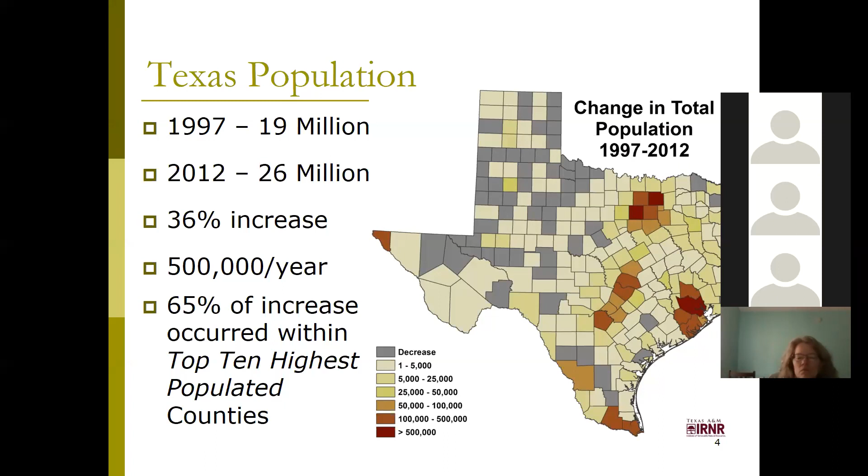And so when they saw that population change, what they did at the same time was also look at the loss of rural working lands over that same time period. And when they looked to see where that rate of conversion was happening, they saw a lot of that was linked to those areas where we're seeing that increase in population, where we're losing some of those rural working lands, and a lot of times those cities are getting built out. So we're building more parking lots, more buildings, residential areas to support that increase.

And what happens is then that's changing the look of our watershed. So we're losing those rural working lands that had good vegetative cover, healthier soils that are going to be able to absorb a lot of that water and slow down that flow of water, especially during those storm events. And a lot of times making it impervious as we're building streets and parking lots and buildings. So then that's not going to be able to soak in and absorb that storm water. So now it's just going to be running off of your system.

And so when we see that, that's one of those drivers for these increasingly damaging floods that we are especially seeing in our urban areas, because now during those storm events, we're not going to be able to capture as much water on site. So we're going to be having a higher volume of water moving faster, and it's going to be causing a lot more damage during those larger storm events in the cities. And I think all of us that live in these urban areas around Texas have seen some of the effects of flooding in our areas.

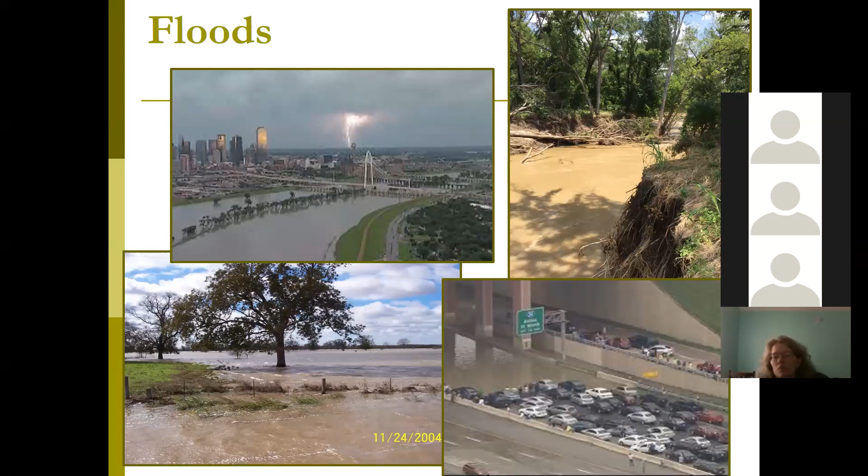The other effect of having poor riparian areas and the change of our watersheds from the increase in population is that when we have that higher volume of water and when it's moving faster and you don't have that good vegetation that's slowing down the flow of water and helping to protect those banks, we increase the amount of erosion along the stream system, the erosion along the banks.

And so when we're having more land that's falling in with those higher erosion rates, then we're losing land that we could be using for other purposes. It's going to lower our property values. It's also a risk for human safety, especially in our more public areas where there might be a lot of erosion. And when we have all of that excessive erosion, we have more sediment that's entering into our stream systems.

And so when that excessive sediment gets into our streams and then it's going through the river, once it hits a reservoir or a lake where that fast moving water then slows down, that sediment starts to be able to settle. And as it starts to settle, it's going to start reducing the storage capacity of that lake or reservoir. So, some erosion is natural, but when we have that excessive erosion, that's when you start getting more and more sediment entering into our stream systems, and then it starts settling and reducing that storage capacity.

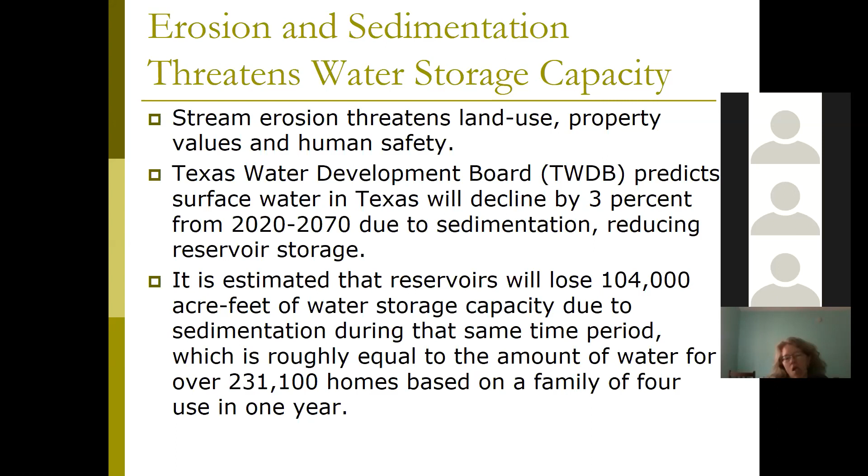And unfortunately, right now, there's not a lot of great strategies for how to combat some of this sedimentation that we're seeing. So the Texas Water Development Board also noted that sometimes the dredging, so trying to remove that sediment from that reservoir once it's already in there, can be just as expensive, if not more expensive, than just building a new reservoir completely, which isn't exactly the best option either, to build a whole new reservoir instead of being able to remove that sediment.

So several areas, such as the city of Austin, have found that being a little bit more proactive helps. So instead of trying to spend all this money or trying to figure out how to improve this once that sediment has already entered into the reservoir and already has started to reduce that capacity, what can we do to prevent it from even getting to that point?

And so what they found is by improving their floodplains, providing that good vegetation, and helping stabilize those banks, they can capture some of that sediment and reduce the amount that's entering into our streams and creeks. So that's going to save money in the long run. You have to put out more money in the beginning, but it's going to save you money because you're not going to have to build a new reservoir or dredge it after it already becomes a problem.

So all of that has brought us to why we wanted to start offering this program. Dr. Jaber has been doing these programs up in the Dallas area, but we really wanted to bring it statewide because a lot of these issues are what we're seeing around all of our urban areas here in Texas. And we want to promote the idea of doing stream restoration, but also making sure we have some of these ecological benefits of having these healthy riparian areas and these healthy stream systems.

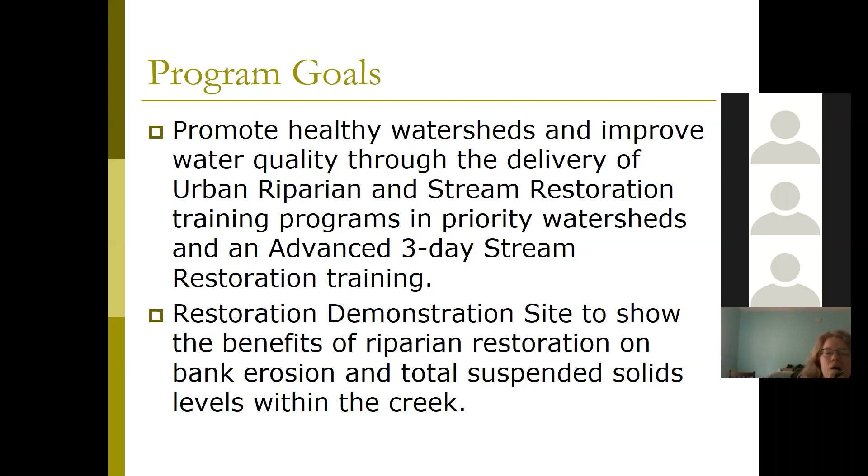And so we do that by offering these educational programs, but we also have a demonstration site in Seguin, which I'll talk about in a few slides. So these programs traditionally are one-day trainings that we try to focus on the urban areas because that's where we're seeing a lot of stressors and a lot of changes in our systems.

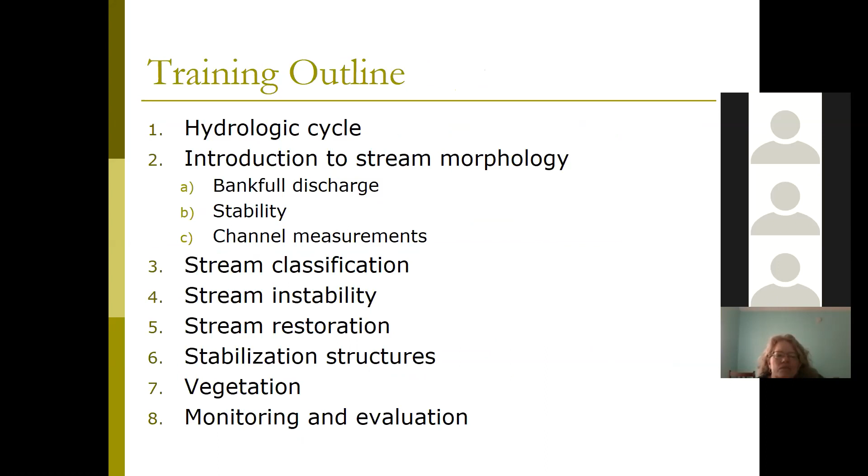And then the other part of this, besides doing these educational programs, is we really want to be able to have a demonstration site where we can hopefully show some of what we're teaching, some of these benefits that we're talking about. So we're working with the Guadalupe Blanco River Authority, the Irma Lewis Seguin Outdoor Learning Center, and the Geronimo Alligator Creek Watershed Partnership.

And we've set up a control site and a treatment site on the Geronimo Creek, where we've done natural vegetation on 100 feet of the bank, and then we left a site that we didn't vegetate, and we're monitoring both to hopefully show that having good natural vegetation is going to help reduce sediment from entering the creek and help reduce some of the erosion rates along the banks.

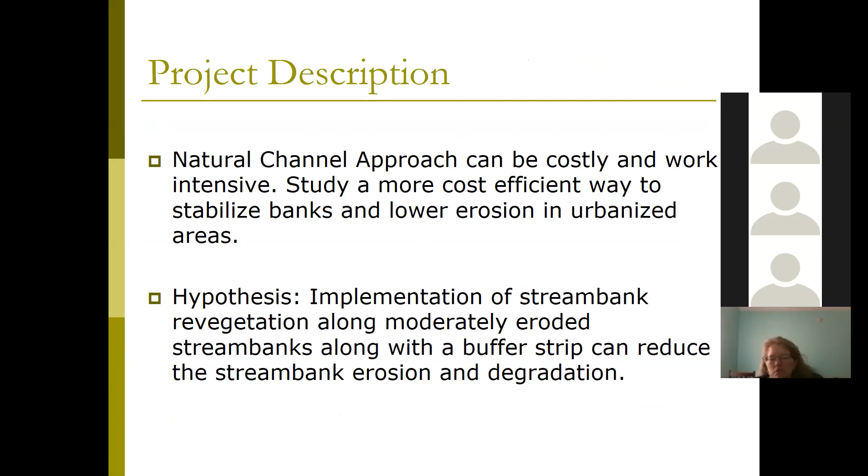So the hope is for some of these areas where maybe you don't need to do a full engineering project, where it's only moderately eroding, maybe you can look at just doing some of these low-cost things, like adding in more natural vegetation, good stabilizing vegetation, as a more cost-effective way to help restore these areas.

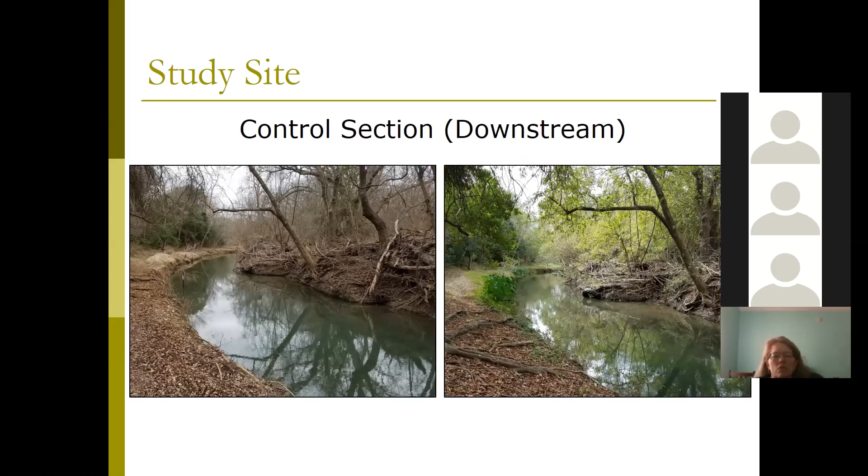These are pictures before planting of what our treatment site looked like. So you see that it was pretty much just some weak grasses. There were some elephant ears that we left in place for a little while as our other vegetation set, and then we sprayed to try to remove some of that. And then here's a picture of our control site down at the Outdoor Learning Center.

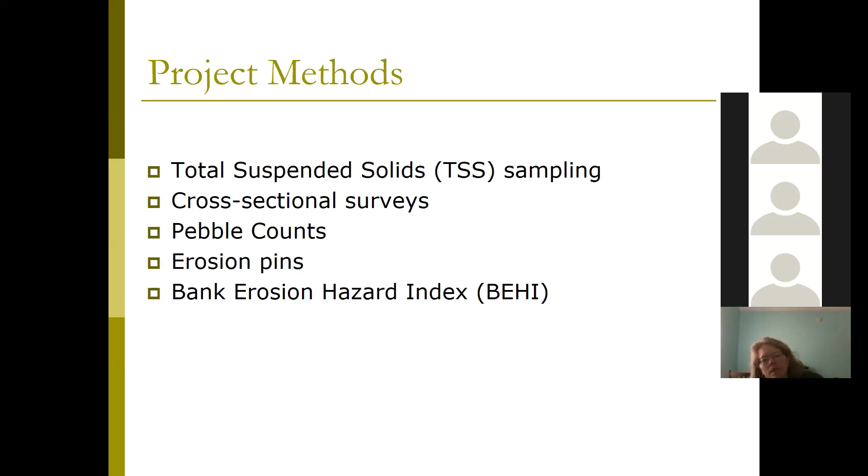So what we're doing is we're sampling for total suspended solids within the creek. We do that quarterly, as well as during storm events that produce 1 inch of runoff. We're doing cross-sectional surveys and pebble counts annually, just to see how the profile of the stream channel changes. And then we also have erosion pins and the Bank Erosion Hazard Index that we do quarterly, to see if we're having a lot of erosion or if we're slowing down erosion, comparing the two sites.

So this is a look. We have ISCOs set up to capture storm events, and then we take it to GBRA to do the analysis for TSS, as well as grab samples during our quarterly monitoring. And we have these ISCOs set up at the start and at the end of each of our treatment and control sites, so we see how much is coming in and how much is leaving the system during each of those events.

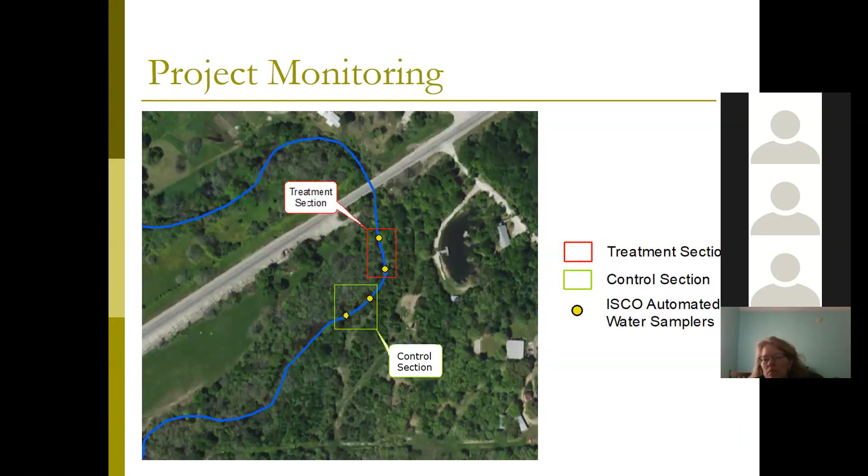At each of the treatment and the control sites, we have 4 cross sections that we measure annually to see the change in the profile, as well as we do pebble counts. And we will talk to y'all more about what the cross sections and the pebble counts are later in the day, but we won't actually be able to do them today.

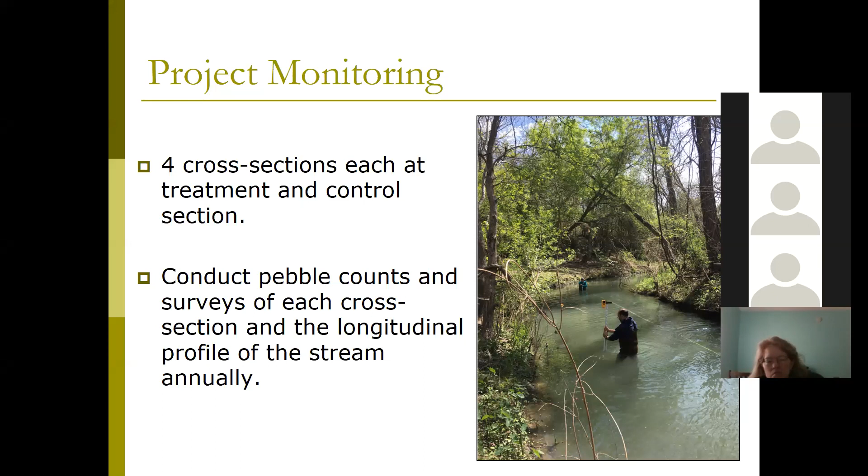And so we'll do that at each of the cross sections quarterly on both the treatment and the control site. So what we hope to show is that by adding in that good, healthy vegetation, by providing some of those natural services, it's going to provide those ecological benefits that we want. It's going to help dissipate the stream energy, so it's going to help to slow it down. And by slowing down that flow of water, especially during those storm events, it's going to help stabilize the banks more, so that's going to reduce some of that excessive erosion.

We're going to be able to trap more sediment, and being able to trap that sediment, it's going to allow us to build and enlarge the floodplain. So that's going to give us better water storage capacity. It's going to help slow down that flood water. And when we're able to store more water on the land, it's going to allow for some groundwater recharge and also allow us to sustain the base flow, which is especially important during those summer months when we're not seeing as much rain, to be able to still provide that water.

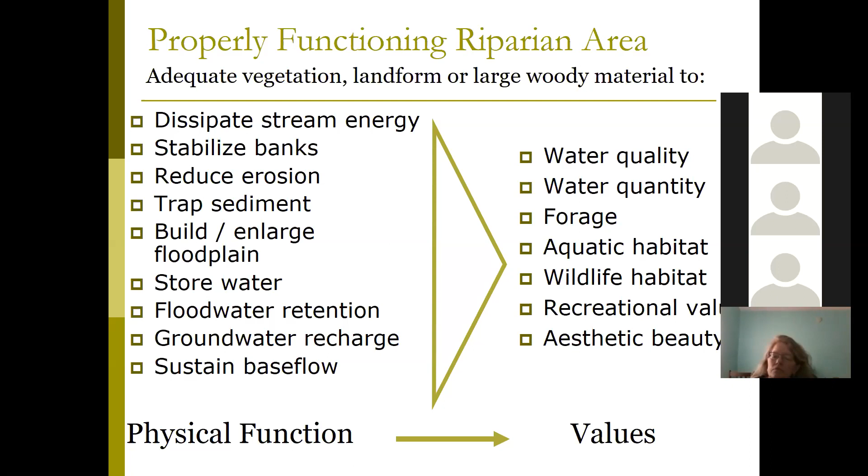And so what we really try to show is, even though we call it a watershed, we want to think on a watershed scale, we really don't want water to be shedding off of our landscape. And as much as we can, we want to make our watersheds a water catchment, where we're going to be able to capture more of that water on site and to slow down that flow, and also be able to pick up any pollutants or sediment as it comes off of the landscape.

And these water shedding and water catching systems, you can see right along the stream banks as well. So here up on the top left is, I think, from excessive grazing on this property, but you can see there's really nothing protecting those banks or that stream system during any large runoff events, as opposed to down on the bottom right, where that's going to really be able to slow down that flow and help protect those banks more.

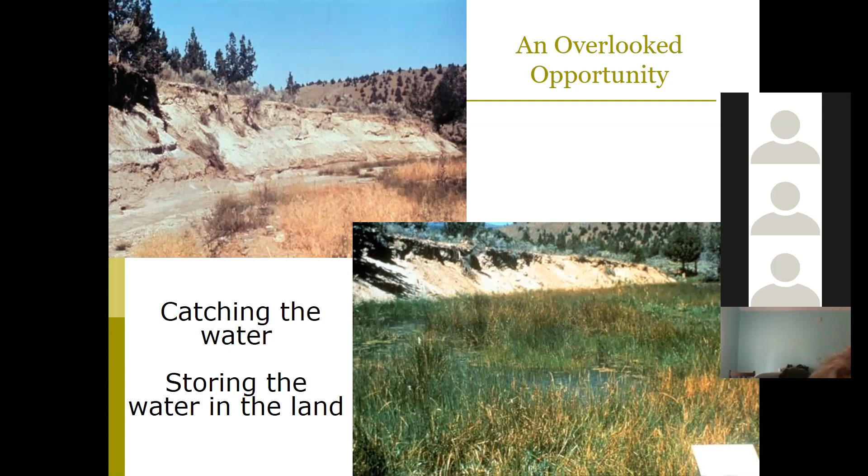And there's a lot of other benefits that come when you're managing your stream systems for these healthy riparian areas. As I mentioned, it's going to improve water quality. So we're going to see less bacteria, nutrients, and sediment entering into our stream systems. We're going to see lower in-stream temperature. It's going to improve our dissolved oxygen levels.

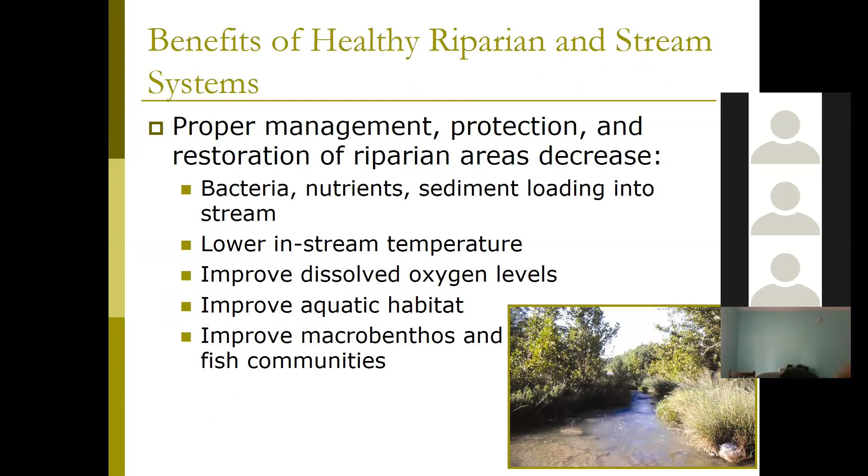It's going to, which improves aquatic habitat and also allows for a better diversity and a better habitat for those macrobenthos and those fish communities. And so that all leads to making sure that we're improving and protecting our water quality of our existing water supplies here in Texas. This is something we work a lot with at the Water Resources Institute, as I know many groups do around Texas.

So I just want to touch briefly on how we see some of this vegetation improving some of our water quality issues here in Texas. So the state, the Texas Commission on Environmental Quality, every 2 years, they will assess all of the monitoring data that they have for streams around Texas. And what they do is they look within the last 7 to 10 years and look for the monitoring where they have enough monitoring data to do an assessment.

And then they'll check to see, based on what that designated use is for that water body, if it's meeting its associated water quality standards. And I'll talk about designated uses and those standards in the next couple slides. But just to show you, 2016 is the most recent accepted report that has been released from the Texas Commission on Environmental Quality. And they were able to assess about 1,400 water bodies that had enough data from the last 7 to 10 years.

And so what they found was about 574 of them were not meeting their designated uses and those water quality standards associated with it. That is actually a decrease from the 2014, so about 15 segments got delisted from the 2014 report, so we are seeing some getting taken off, and that's for a variety of different reasons as we get more monitoring data, but also we have a lot of people working on these watershed protection plans and total maximum daily load implementation projects around Texas to address a lot of these water quality problems.

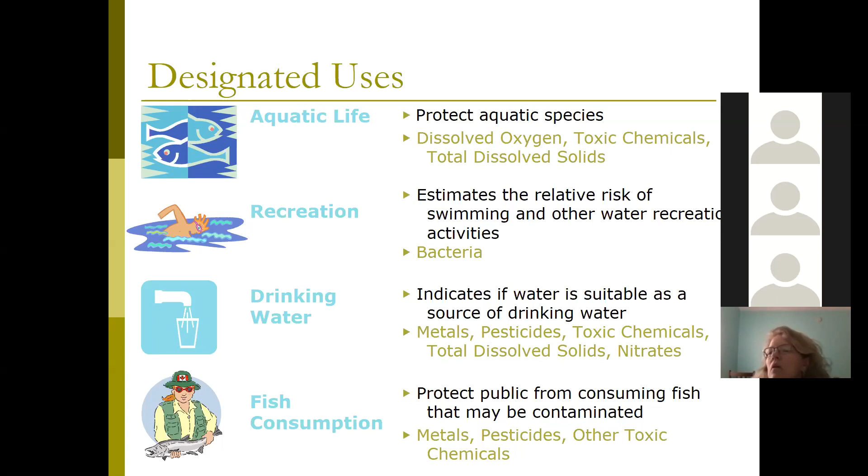For recreation, the main thing that they're testing is for bacteria. And then for drinking water and fish consumption as well, they have their own host of water quality standards. So based on that designated use, when they're looking at that monitoring data, they're looking for those specific water quality parameters to see if it's meeting that designated use. And so here's just an example for the water quality standard for high aquatic life. So you can see for some of them, it just has to be above or below a certain number. Sometimes it has to be within a range. But all of these really vary based on what your designated use is for that water body.

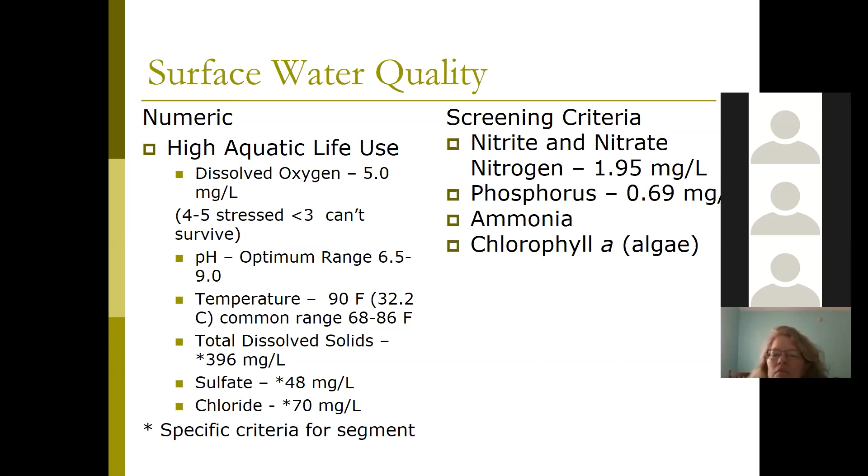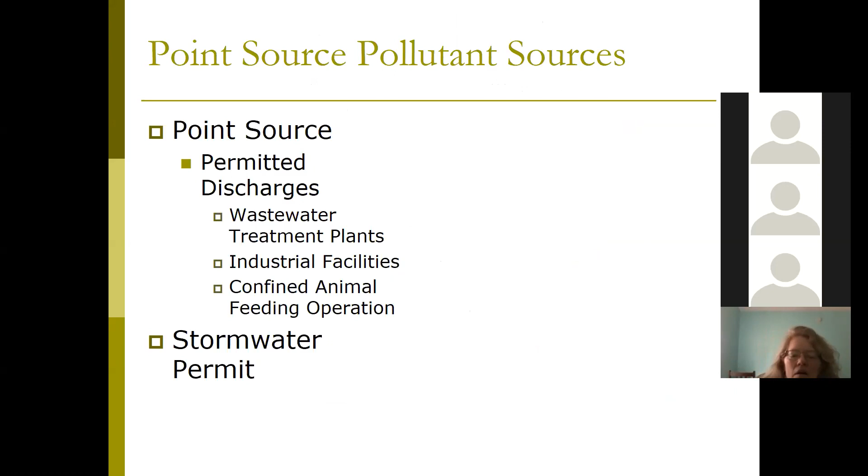And so when we go to a lot of these urban areas to do these trainings, there's usually always a project close by that we can call on to have come in and talk to us about some of the work that they're doing in the area. And so the main thing that they look at when trying to put into these plans to improve water quality is they're looking at point source and non-point source pollutants. And so point source, as the name kind of alludes to, it's a lot of times coming from a pipe, but it's really something that you can kind of point to and say, that's where this specific thing is entering into our creek, into our stream system.

And so that's kind of your wastewater treatment plants, your industrial facilities, your confined animal feeding operations, where they're discharging something directly into the creek. And for point source pollutants, you do need a discharge permit to be able to discharge into the creek. So it does require a permit from the state that has monitoring requirements, as well as they get audited every several years from the state to make sure that they are meeting those standards that are set out in their permit. So there is some regulation that goes with those specific pollutant sources.

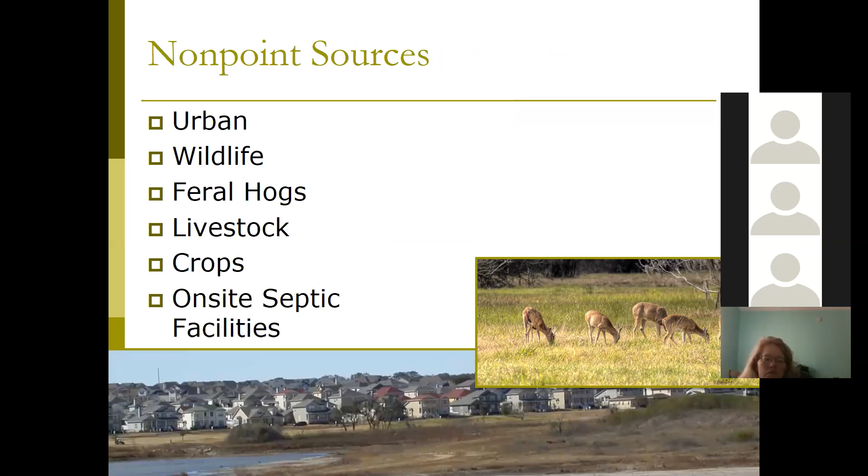The other one that's a little bit harder is the non-point source. So with point source, you can actually point to something. Non-point, there's no one specific area where that pollutant is entering into our system. It's more diffuse off of the landscape, during those large runoff and storm events where it just gets picked up and entered in, but not one specific spot. So that's a lot of the pollution from your urban areas. There is a little bit with stormwater permitting now to try to regulate some of those pollutants.

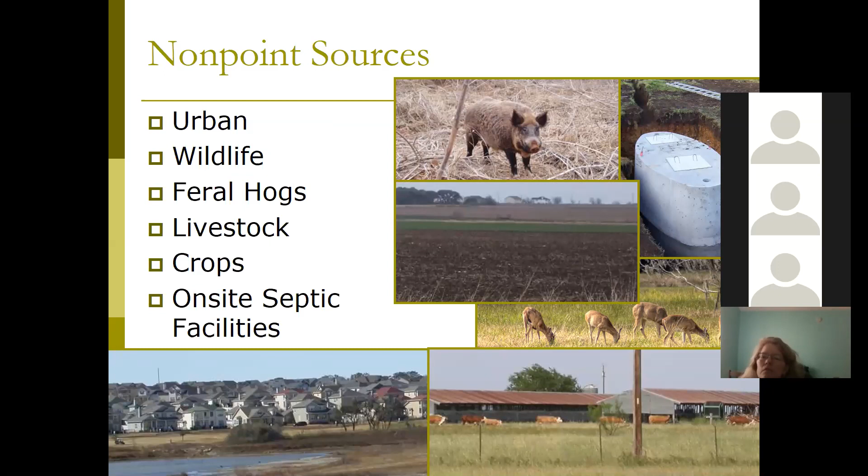But anything with wildlife, feral hogs, livestock, especially if they're spending a lot of time in and around the creek, have a risk of defecating around the area and can cause increased bacteria levels. Crops, if you're not using your fertilizer or pesticides appropriately, using too much or using it at a wrong period of time, can be non-point source pollutants. And then on-site septic facilities, when they're not being maintained properly, have a risk of polluting your stream systems as well. So for these, since there's not one specific area where it's entering, it's a little bit harder to regulate on a state level. So for the most part, we really try to focus on reducing the risk of those entering into our stream system.

So a lot of these plans talk about how to maintain your septic system so that it's functioning properly. Proper fertilizer and nutrient management for not just agricultural areas, but also for homeowners and cities. If you have livestock on your property, proper rotation so they're not spending as much time in and around the creek. So all of those different management measures to try to reduce some of that, again, being proactive and reducing it before it even enters into the creek, are the key things.

And then again, for us, having that healthy riparian area, that good vegetation around your stream, adds one extra layer of defense to be able to capture any sediment or pollutants that might be coming off of your landscape before entering into your stream system. So that's why we feel there's a good partnership between what these plans are talking about and what we work towards in our programs as well. So with that,

our stream systems, if not the most, are one of the most important natural resources here in Texas. They go through not only our cities, but rural areas, private lands, public lands. So it really takes a concerted effort by everyone to make sure that we're protecting these natural resources. So that's why we feel it's important to host these educational programs around Texas to make sure that we're all doing the best we can to protect our stream systems and our water.

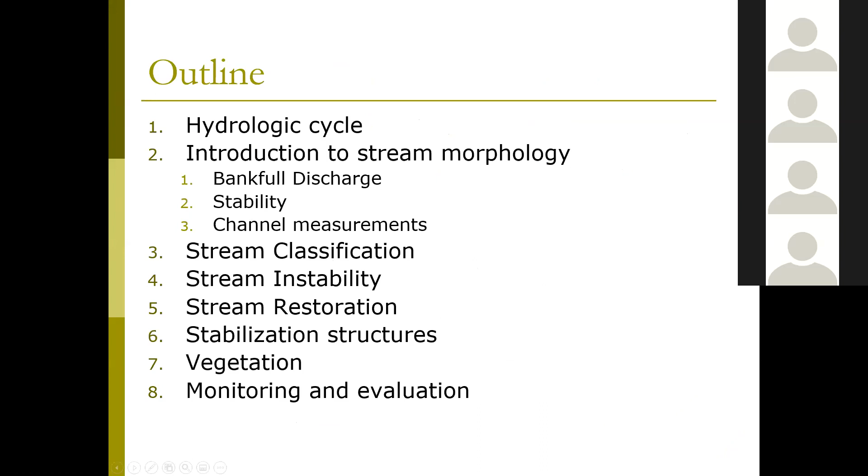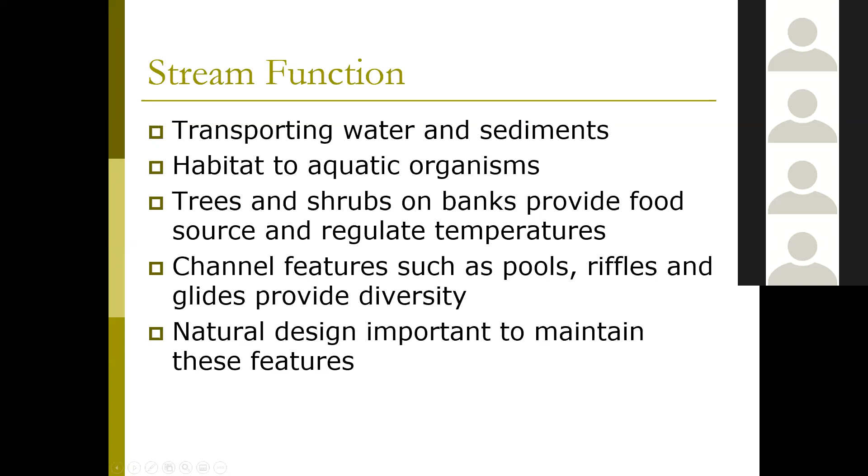And so when we're talking about restoration, which is the title of this workshop, we're not only saying that we're going to restore the water flow, which is how a lot of engineers through time approached it, but a natural design that restores all the functions of a stream, from transporting water and sediments to becoming a habitat for organisms, and having the diversity of biological organisms that should be there in the system. How will we do that? Well, it's first by learning how these streams form and what the processes are by which streams form.

And so studies of thousands of streams all over the world have shown something very important: there is a flow that has been defined by river scientists as the channel defining flow. That's basically the flow that carries the highest amount of sediments. That flow was calculated, and it was found that it matches, in nature, the part where the channel looks like a bowl-shaped section.

So you can actually go to the field and look at the stream, and it should have a flat area, the floodplain, and then a bowl-shaped part when you're looking at it as a cross-section. When you determine that in the field and go back, it actually matches the flow that carries, over a long period, the highest amount of sediments. So basically everything can be calculated back based on the Bankfull stage. Since you can determine that Bankfull stage from the field, you can always go back to it and try to restore a stream to look in this shape.

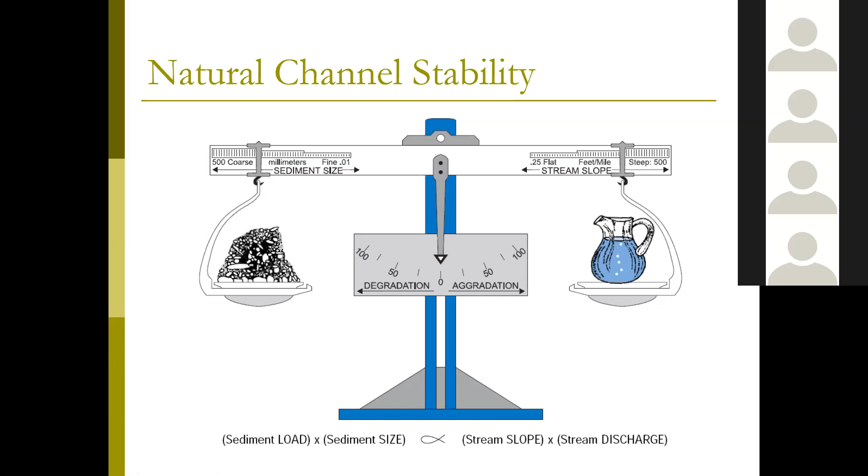So stability means a climate-based bankfull flow that is consistent, that carries a typical sedimentation, and any messing with that balance will cause instability. So in order to be able to restore a channel, we need to understand the channel when stable. And the bankfull can be determined in the field for any type of stream, because even in a stream that's eroding, the bankfull is always trying to reform again. So there's either a notch on the side of the bank, or you can see the whole bankfull reforming with time. So you can always calculate everything and relate it to the existing bankfull.

The cross section of a stream at bankfull is called the channel dimension. That's the definition of it. And these streams, they change as you go downstream, as the watershed gets bigger. So when you're measuring a channel dimension, you need to understand that the section you're using is valid, because you're going to do all your calculation based on it.

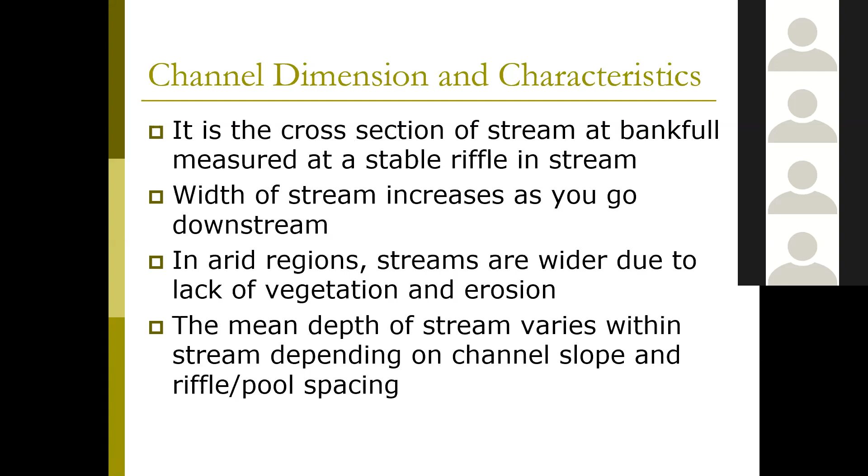There's no specific depth, because again, these streams have features too. So the only thing that we can really relate back to a natural stream is that channel dimension, which is the cross section of a full stream, the bankfull. That's your channel dimension. So we looked at the cross section. We have a section that will carry the 1.2 to 1.5 year storm with floodplain on the edges.

What about the top view? If you look at the top view, the stream meanders naturally. Natural streams, historically, we have come back and straightened them for many reasons: land loss, land use, roads, buildings. But in reality, that meander has a big function. The stream starts creating these meanders in order to decrease the slope, right?

When you go straight from A to B, if there's a 10 feet difference between these two and it's 100 feet distance, that's a 10% slope. But when you go along the meander, that slope drops by half, if not more, and becomes less than 5%. And so that's the meander's role in nature. Now, when you're restoring the stream, you want to think about re-meandering. In order to re-meander a stream, you have to be able to identify and reconstruct a typical meander in that typical stream.

And so the points that we measure: there is your belt width, which is the distance from bank to bank along the height of the meander. You have the wavelength, which is basically the straight line length between point A and B. You have the amplitude, which is from the middle of the stream to the top of the stream. And there's a definition of the curvature itself.

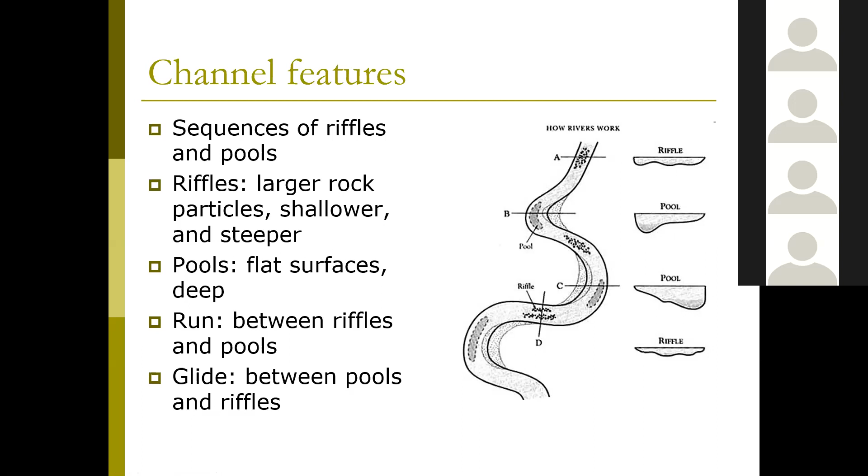And again, those have a function in how the different organisms can survive, and they have a function also in stability of the channel. So again, when we talk about natural channel restoration, what are we talking about? We're talking about restoring a channel to meet the full ecological function of the stream. And so we need to figure out what is bankfull, and how we can make sure that the flow and the sediment flow without deposition or erosion.

And so basically, the only thing we have from the stream we want to restore is the reference, the bankfull section, because we can determine that from the field. And so what we need to do is figure out how it looked before it got degraded. And the best way to do that is to find similar channels in the area and collect data from these similar channels. These streams that are healthy in your area are called reference reaches.

And so if you're lucky enough to be able to find a healthy stream in your area, then you can compare and scale your stream to that stream using the bankfull as a common term. Now, if the reference reach does not exist, there are things we call regional curves that help you relate your bankfull to different healthy terms like the meander wavelength, the distance between the pools, etc.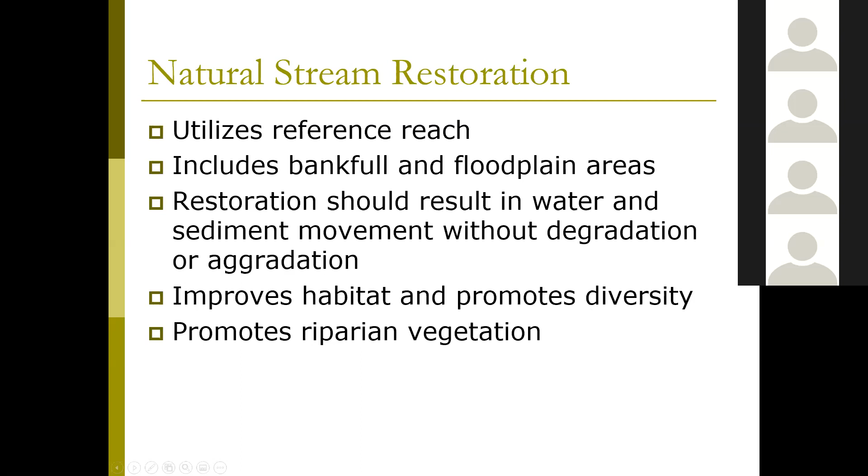So these are really our goals. Our goals are to restore the channel, restore the cross-section, restore the profile, restore the meandering pattern. But before we go and do a full project that involves serious construction work, we need to know where we are in the stream. And so the first step in a process of stream restoration is stream assessment. And for the stream assessment, here are the following steps.

The first thing you want to know is the drainage area of your reach that you're trying to restore. Where is the water coming from? And then some type of analysis that's going to help you with understanding what are the expected flows in that cross-section based on different rain events. So you would know the 1 year event, how much flow it will cause, the 2 year event, the 3 year event, and then specifically you want the bankfull event to make sure that your bankfull that you measure in the field is correct. So you get that watershed drainage area.

The second thing is you determine the land use. That's also in the same function, because while trying to determine the runoff at a specific point, you need to know the land use. Is it mostly urban? Therefore, one rainfall event will produce a lot of runoff. Or is it mostly forest, so very little runoff, or is it agricultural? So it's in between. So you want the land use and the watershed drainage area.

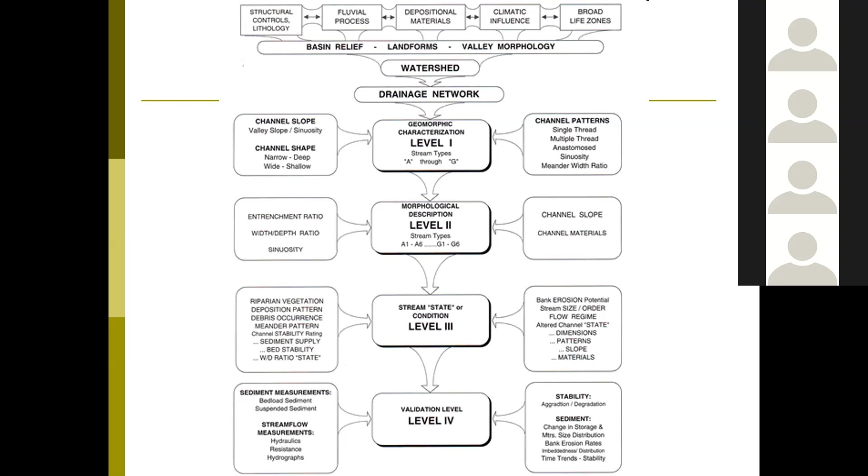And you can go and look at biological functions. Are you restoring your biological organisms? Do you have functioning ecological systems? And all these things are the things that are going to determine whether your restoration action has worked or not.

So let's go look at level 1 assessment, which is a fast look at the channel to preliminarily determine what letter it is. And we said there's letters from A to G, and these can be determined by looking at the stream. You look at the cross section, you look at how straight or meandering it is, and you look at the slope. And based on these, you can take that sheet with you to the field and look at it. If it's very high slope, it's probably an A.

These are typical natural channels found on the side of slopes, and they're usually confined within the channel. The blue line here is the Bankfull in all the channels in the cross section. The blue is the Bankfull, and the dotted line is the flood-prone area, which is basically double the depth of the Bankfull.

And usually, if the width at bankfull and the width of the flood-prone area are pretty close to each other, that means that this channel is usually highly prone to erosion. These A and A+ are probably in most cases bedrock at this point because they're natural form.

We'll talk about a similar channel that is actually not on the side of mountains, with a lower slope, and these usually are more eroded streams. So B, C, and E are usually channels that are naturally formed that could be stable, and in general, the B is usually a stream that has a slope from 2 to 4%.

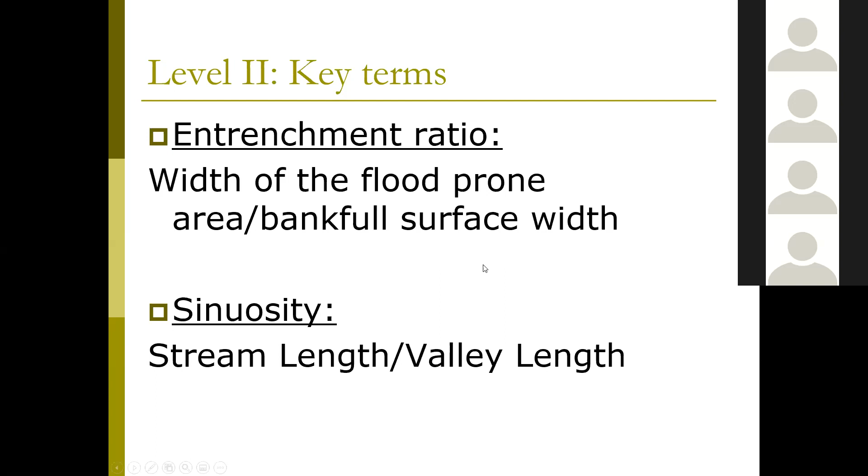The second term we talked about is sinuosity. We said it's a determination of how much the stream is meandering, and it's basically the stream length. So you measure the distance between A and B along the stream, and the valley length, which is the straight line between point A and B. You measure that distance, you divide the stream length by the valley length, and that gives you the sinuosity of your stream.

We go here to level 2. So level 2 confirms your letter and adds a number to it. So that's a flow chart again that you start with. The first line is single versus multiple channel. If it's multiple channel, then it's going to be a D or DA, and your slope mostly decides what type of stream it is, D or DA. If single channels, which are more common in this area, are what you're interested in, you start with your entrenchment ratio. If it's under 1.4, it's going to be an A, G, or F. If it's greater than 2.2, it's going to be an E or a C. And if it's between 1.4 and 2.2, then it's a B.

From that point, to differentiate between the different groups within, you look at the width to depth ratio, and that's at bankfull. If it's below 12, then it's either A or G. If it's higher than 12, that's an F for the first three. For E and C, E has a width to depth ratio smaller than 12, and C has a width to depth ratio greater than 12. To confirm more, you look at the sinuosity. If it's less than 1.2, it's an A; greater than 1.2, it's a G or an F here. With E and C, greater than 1.2, it's a C; greater than 1.5, it's definitely an E.

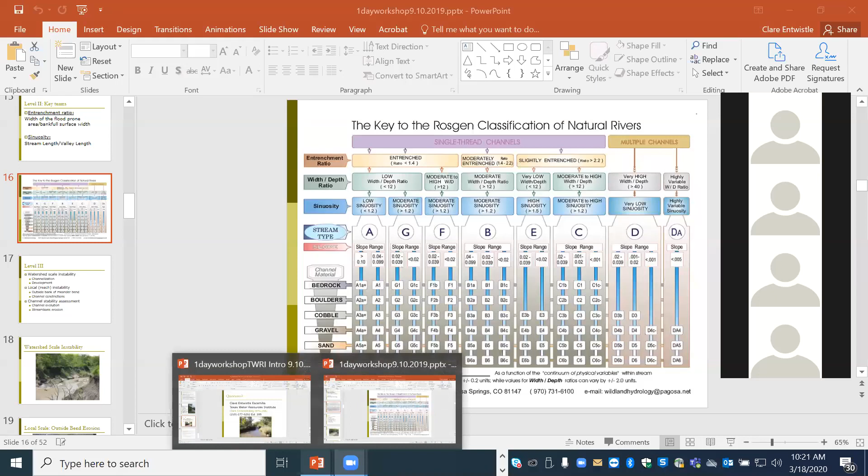It's not happening. Looks like the internet got lost. It's connected to the Wi-Fi, just that there's no internet. It's not coming back. I think Spectrum cut me off. Maybe I used too much bandwidth. Okay, if you can do it, I will just say the number of the slide as I'm going, and then we can continue. How about that? Do you have the book with you? I have the presentation in front of me. Oh, okay. Okay, so let me get it back sharing on mine. Okay, we're on slide 16. Okay, I have slide 16 up. Very good. Sorry for the home teaching problems.

So I was talking about how these help in determining the letter, but again, keep in mind that entrenchment and sinuosity and width to depth ratios can vary, and therefore several times you would measure 1.5 and think it's definitely a B, even though there's never been a B in that part of the country. And it's really because the entrenchment may vary by plus or minus 0.2. So actually 1.5 can easily be A, G, or F, for example. And same thing with 2.1. It could be actually B, E, or C. So that's to keep in mind.

The second part is the number. As you can see at the bottom, it determines your channel material. We said that we do a pebble count. Basically, we do a cross-section and collect different types of material in the bottom of the stream. There's a specific method to do it, and we'll talk about it later. With all this material, you determine your D50, which is basically the average size of the particle, the channel material in the bankfull section. And based on what that D50 is, whether it's bedrock, boulders, cobble, gravel, sand, or silty clay, and there's a very specific measurement to define each of these categories, you can give a number to your stream.

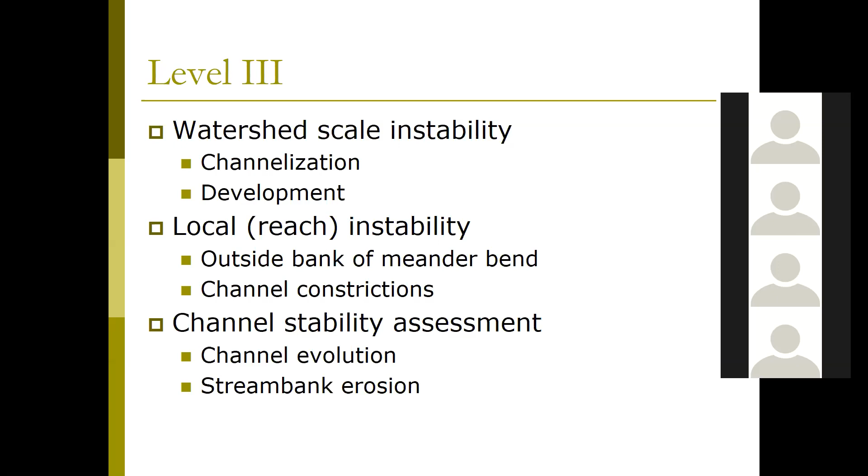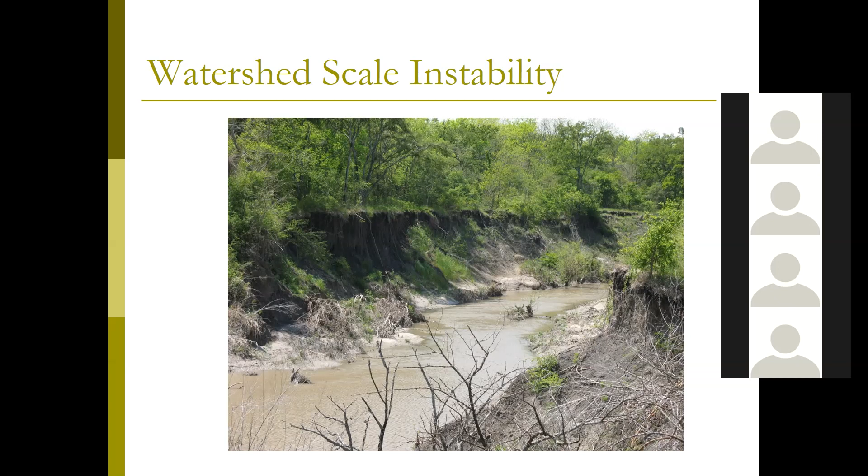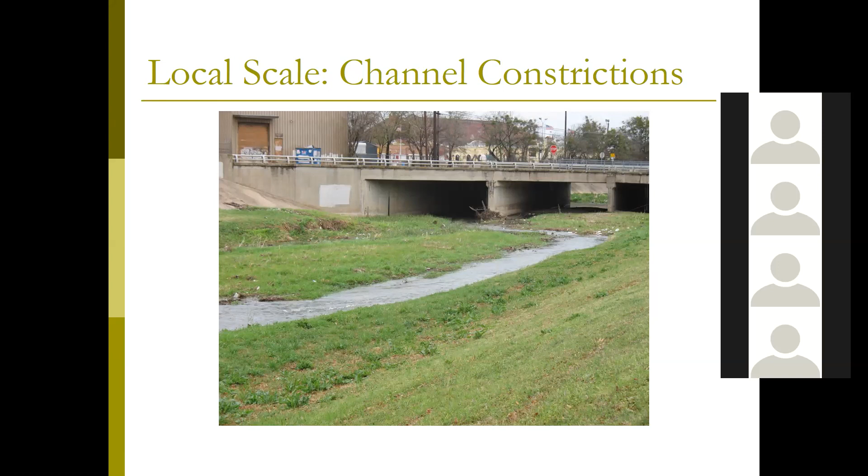Whenever the water overflows bankfull, it goes into the floodplain. There's complete connectivity there. The water helps the riparian vegetation to grow, which in turn holds the bank stable at that section. If construction starts happening, and now for typical flows that fill bankfull, you're getting higher flows, then that flow is going to be fast enough and it's going to start causing erosion in the bank, and the stream starts changing from that

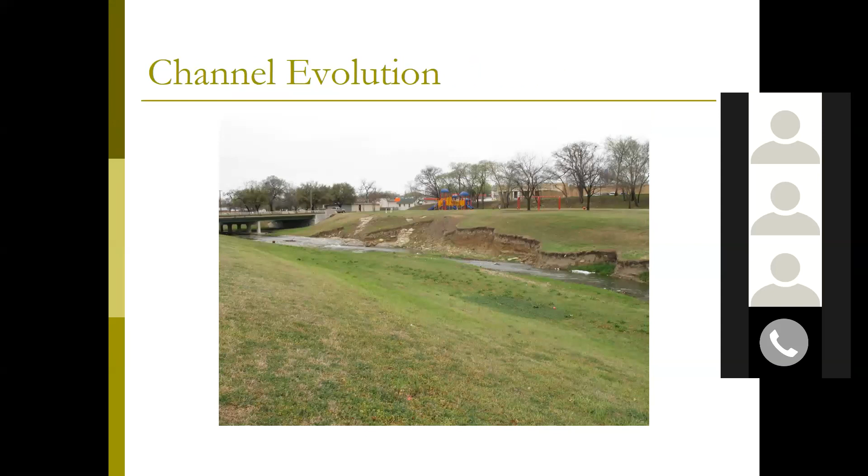You can see the channel is becoming braided inside, but then again, every time a storm happens, the water goes all the way to the top and then goes down and erodes underneath the trees, and these trees were falling at a very fast rate. So if you look at a bank, how can you make sure that it has low erodibility? Well, there is a way to do this. So now we're on slide 26.

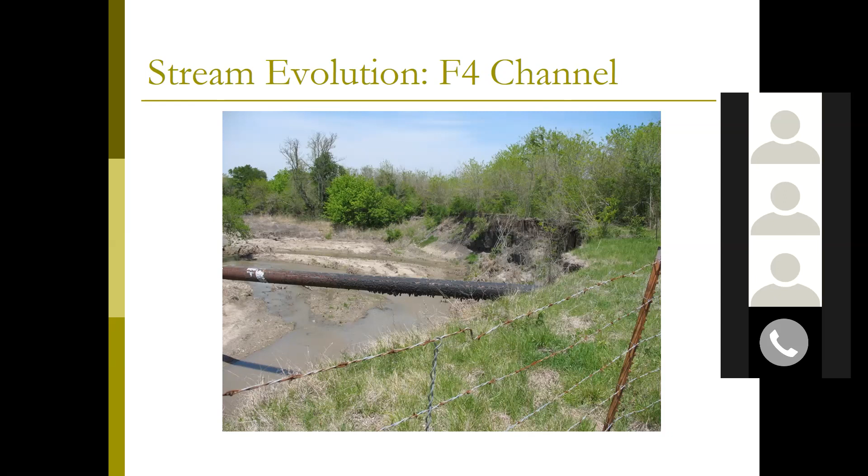If the bank height and the bankfull are the same, then you're actually in great shape, because these bankfull flows are not very erosive, and the high flows have space to dissipate above the bankfull. If it's a little bit below the bank, then you have medium erosion potential. So when it overflows bankfull, there's still some bank, so it's going to cause some erosion in this section. If it's way below the bank, then there's a high possibility for erosion.

The bank angle also: a gentle bank angle has low erodibility potential, while steeper or even negative angles have very high erodibility potential. The density of the roots and the bank surface cover: how much vegetation, and the type of vegetation with very deep-rooted plants, are on your bank. If they are there and your roots go all the way to the bankfull level, then you're in very good shape. If the roots go barely a little bit above the bankfull level, then that's a little bit worse. And again, if they're much higher, that's very bad, because you're going to have undercutting underneath. That's going to cause that bank to start falling in sheets.

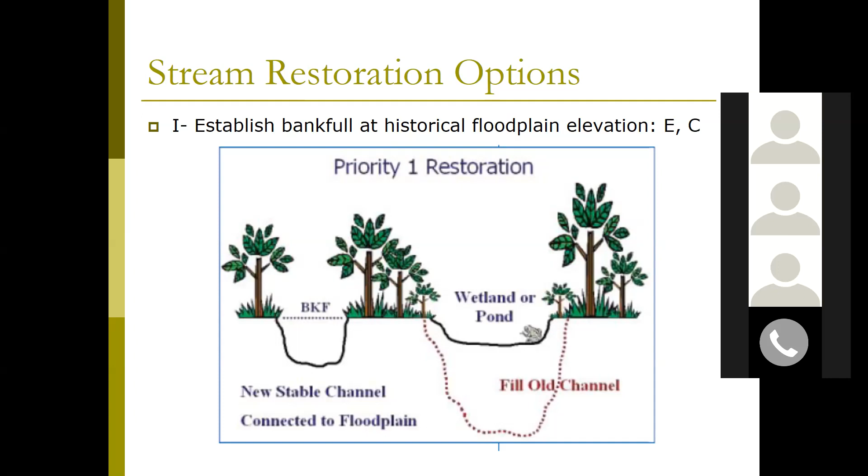Your second priority is when you're limited, you don't have a lot of space. So this is slide 31. You don't have a lot of space and you're confined within where the existing channel is. And so in that case, what you do is you build your bankfull at the bottom of that floodplain and create a floodplain within the meander belt width that you have for your channel. So you create your new bankfull, and then you have a floodplain to dissipate the flow, and then the old floodplain you recreate as a terrace, and then you remeander it.

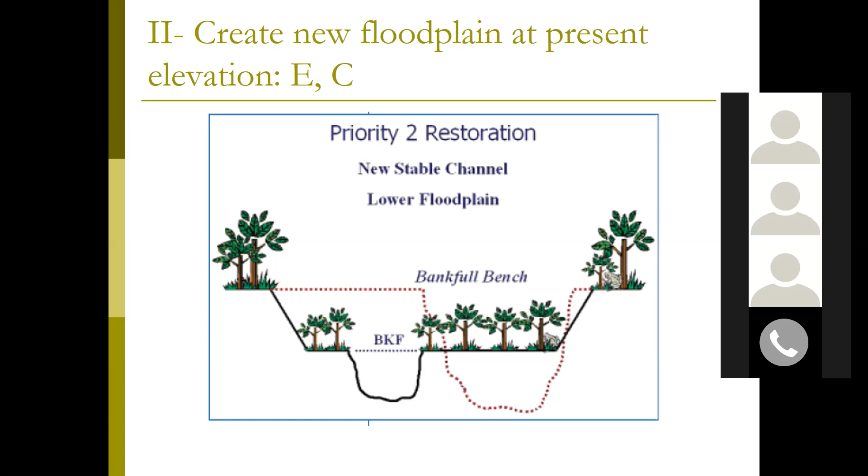Slide 33. Your third priority is when you're completely confined. You have very little space to create a big floodplain on the edges because you have roads, you have buildings that are built all the way to the edge of the channel. And in this case, knowing that your bankfull is going to be much smaller than the existing channel width and depth, you can always go back wherever the channel is. Now, there's usually very little meandering possible in this case. So there might be requirements after you do calculations for some typical reinforcements or in-stream structures to reduce it. But your bankfull is still less wide than the existing channel.

So you rebuild the channel to have a bankfull, and that gives you enough space on the edges to create at least one row of trees or a deep-rooted vegetation layer. And so that's what you do. You put one row of riparian vegetation on the edges, and then you slope the stream back to wherever you're allowed to. And if that slope is too steep because of your limitation, then you can do a structural stabilization on that top channel. But on the bankfull and the floodplain, no stabilization is needed at that point. And so here's an example, slide 34.

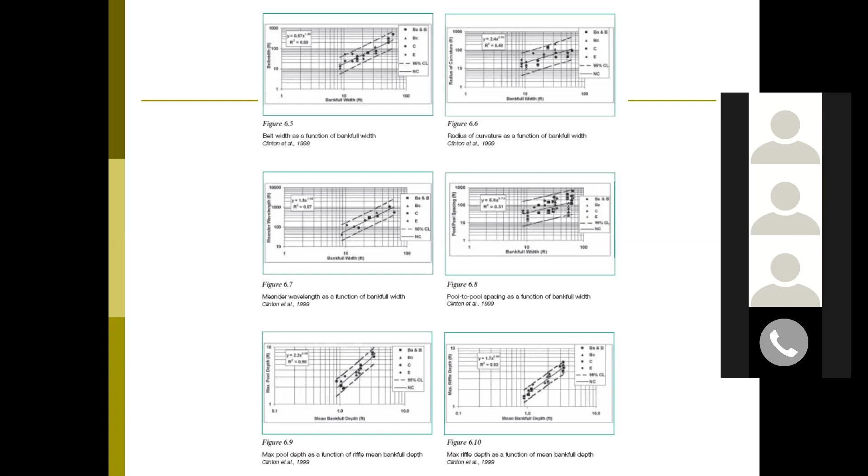Slide 36. So in many cases, especially in urban places, we are always faced with priority 3. And so what we really need to do is stabilize the stream by using some type of structure. Unfortunately, historically, all these in-stream structures disturb the stability as well as the biological function of the stream, whether within the reach they fixed or downstream or upstream.

If they channelize it or if they put gabions, all that usually does not meet the requirement to make the stream functional completely. So we need to think about structures that would actually be in line with our natural channel design approach. And so we'll talk about that in a second.

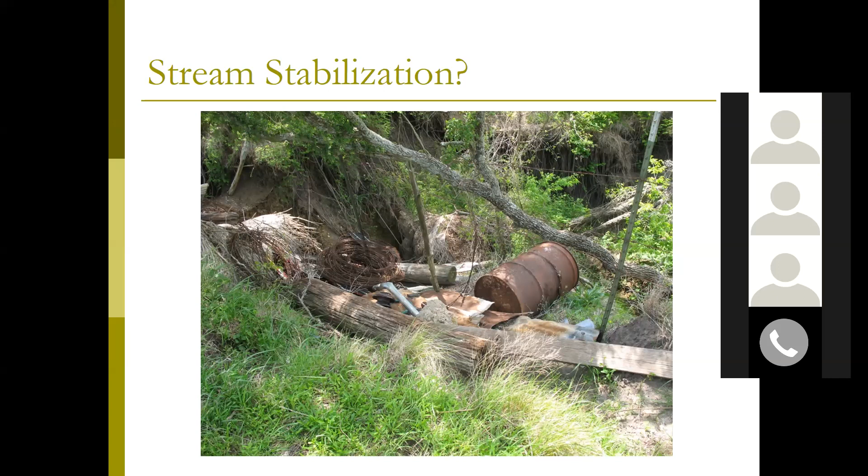So his solution was to dump everything he owned into that tributary, but that is not a valid method. So here are some of the valid methods we're going to talk about. The first one is a root wad. Basically, that's a tree that was probably removed. If you find a tree remover in your area, you take the root ball of a tree and a certain distance, probably 3 to 4 or 5 feet, depending on the thickness of the tree, and then you can insert that root wad in the section that has erosion.

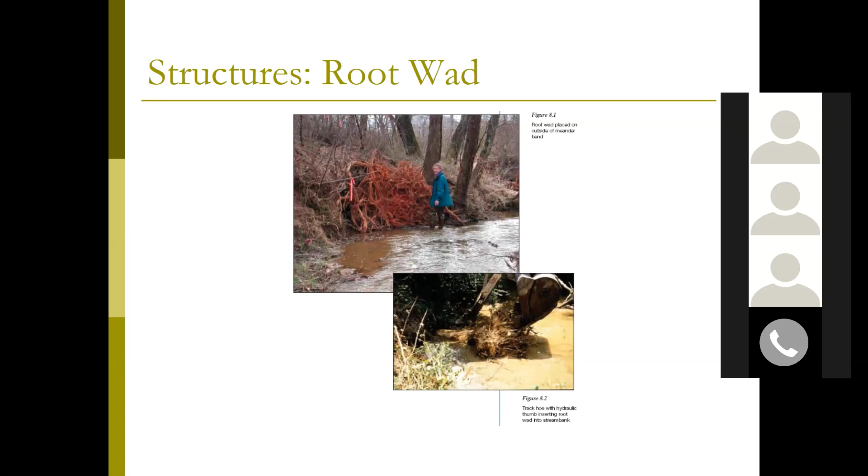What happens is water comes in and the roots, usually that tree is put, a third of it should be below bankfull. So whenever the flow rises above bankfull, it's basically using the whole tree, which causes all this roughness that diverts the water back toward the center of the stream and stabilizes the water right after the root wad, which can cause that part to collect sediments. You know, sediments will settle in it, and it would refill your erosion section by itself.

And so the arm of the vane makes the water go straight into the center of the stream, and the J part of the hook, which are all below bankfull at this point, actually prevent water from creating eddies that can cause problems on the other bank and force the water to stay in the center.

If you don't have space to do meandering, you can build a cross vane and then restart the bed of your stream on the downstream end at a lower elevation, so that you can control slope upstream and downstream. That can be effectively used when your design says you should do a meander, but you have a construction that doesn't allow you to put a meander. So you can put a cross vane that can double as a drop structure to control the slope.

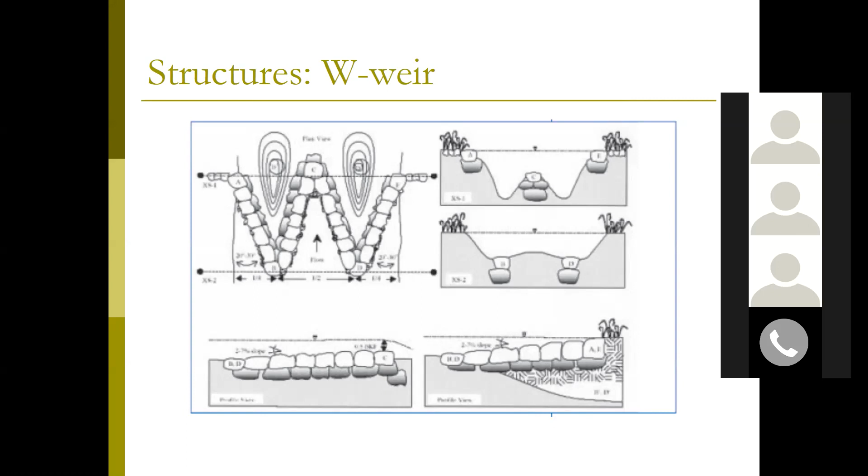So you can play with the height of the culvert and the size of the different culverts and do a calculation of flow that will show you that at each depth, the flow going under the bridge is equivalent to the flow in the stream. And here's an example of that in the picture.

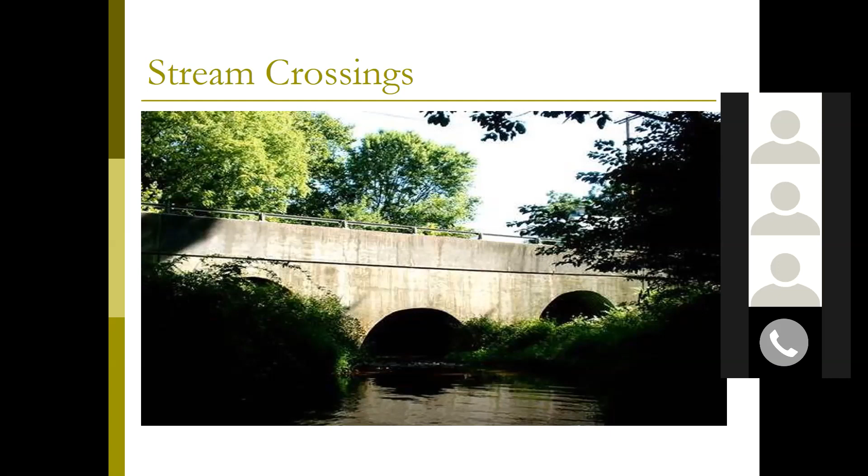Slide 44, we're going to talk about vegetation now. All these calculations usually assume that vegetation is going to be restored. When you do a restoration project, you need to make sure that riparian vegetation is restored.

And so in assessing your stream, the reach you want to do control on, you need to see what type of vegetation is there, what type of plants can you remove, which one you need to keep, which one can you remove and replant, which one cannot be replanted. Are there any specific trees that need to be protected, even though in your design the stream goes right in the middle of them? Maybe you'll need to adjust your design accordingly. And you can collect ecological data too at that site.

Then you do a plant inventory. You get some specialists that understand plants, riparian plants specifically. TPWD is a good resource. Your Texas A&M Forest Service is a good source. And the plant professionals, nurseries can help also. And you can have a full inventory of the existing plants, which ones are natives, which ones are adapted, which ones are invasives. And once you have that list, first it helps you develop your riparian vegetation list, and two, it helps you decide which trees, which vegetation to keep, which vegetation to remove during the project.

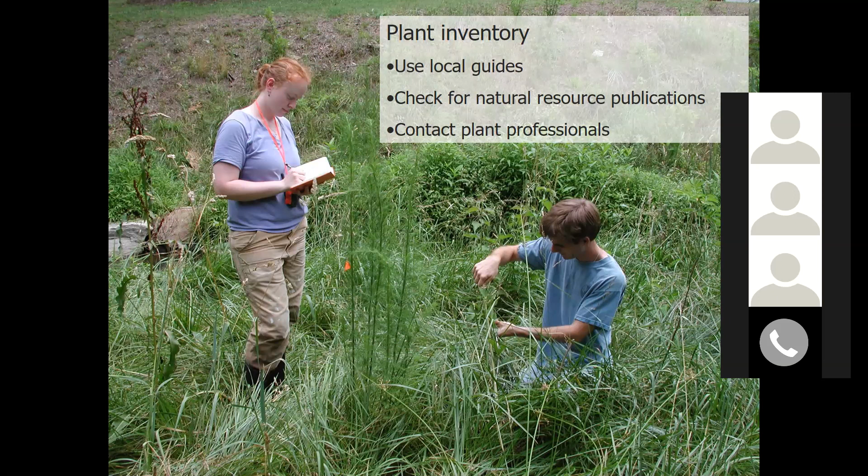The soil fertility is important. In some cases, if a stream has been mowed and grazed for years, there's a chance it might be low on some of the nutrients, depending on the area. It's good to know your soil fertility. You can send the soil sample to the A&M Soil and Crop Science labs. There are other labs that do soil fertility testing also. And based on that, you can decide whether you want to include plant-based compost or mulch in your planting process, or whether the soil is fertile enough to support the riparian vegetation that you're going to bring to the site.

Slide 47, again, invasives are a problem. You can identify the invasives from when you had your inventory, or if you're doing a small project, you can go to this website listed here that has a database of invasive plants. Now, removing invasives and replacing them is very good, but if you have invasives that are full-grown trees and you don't have a good plan to stabilize the section when you remove this tree, it might make sense to keep that tree sometimes. Sometimes you might decide that even though this specific tree is invasive, it's more disturbing to remove it than to leave it.

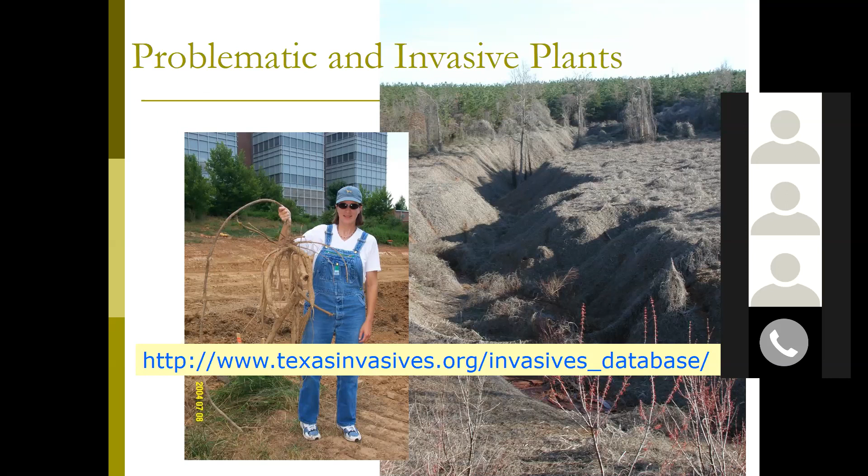But if you have grasses, small plants that are preventing or could prevent your riparian vegetation from growing, or because they don't have deep roots can be a problem for the bank, these need to be removed prior to the project. How do you put the vegetation? There are different ways. You can salvage on-site vegetation and check with a plant specialist if that vegetation can be transplanted easily, and the cost can be a factor there that you need to account for.

The second method is live staking, meaning taking small cuttings from existing trees and plants. You can take those during the winter when the trees are dormant, and then plant them in the early spring, and then they can grow and become vegetation themselves from on-site sources. You can buy nursery plants and do bare root planting, which is recommended, where you plant directly in the native soil, the existing soil, without additional soil. And if there are fertility problems, you can always do container plant material.

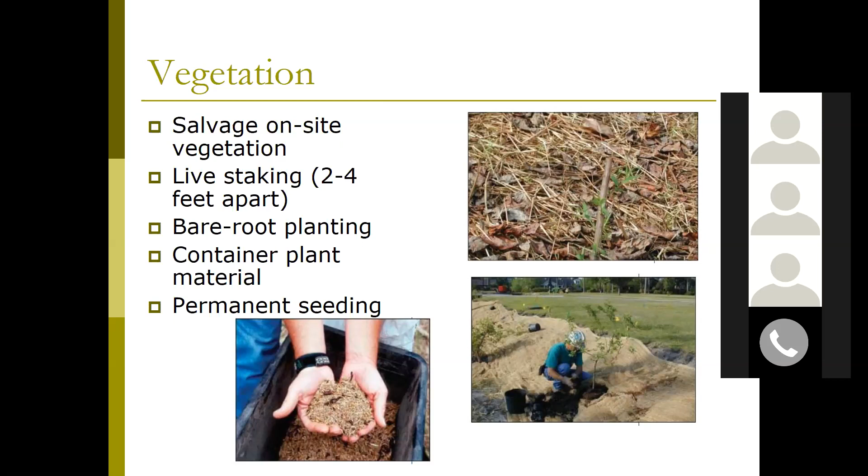Once you have enough vegetation to stabilize the bank, you can go and seed. You can buy seed mixes that are specifically made for riparian zones that are sold by seed companies, and you can seed the whole riparian zone, and with time that will help establish an even stronger riparian section. Mowing stream banks is not recommended.

It's very common in many parks and many locations, but mowing stream banks, in addition to the obvious impact on the erosion of the stream, is also a water quality issue, because healthy vegetation on the banks can capture a lot of the sediments that are one of the main causes of stream pollution. Healthy, big growing vegetation absorbs water in small depressions much faster, thus reducing the danger of mosquitoes. It restores wildlife habitat in many cases and brings nice and fun animals to your area. And so in general, it's not recommended to mow all the way to the stream bank.

Finally, evaluation and monitoring. We talked about this, this is level 4 here. Once you finish a project, you know that this is a natural project. There are so many things that can go wrong. So you need to make sure that you monitor it for at least a while after the project, a couple of years, if not more. And what you want to look at is the morphology. Is it eroding? Is it stable in different places?

If it's small erosion that's happening, you can always come and do some kind of fixing or put one of those in-stream structures. This is easily done by photo documentation, by putting a camera that takes one or two pictures a day. And so you can look at that rather than try to use your memory when you go. It's like, was that there before or not? I can't remember.

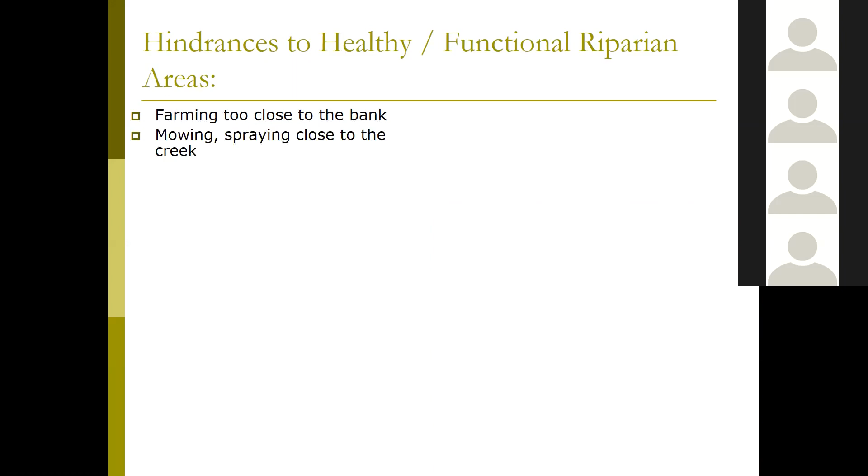Mowing, spraying close to the creek. Manicured landscape next to the creek. As Dr. Driver just mentioned, we don't really want to mow all the way up to the stream bank because we're taking away that bank stability with the vegetation. We're negatively impacting the water quality, and we're actually promoting more of a mosquito habitat. So therefore, even though it may look aesthetically pleasing, we're actually doing more harm than good.

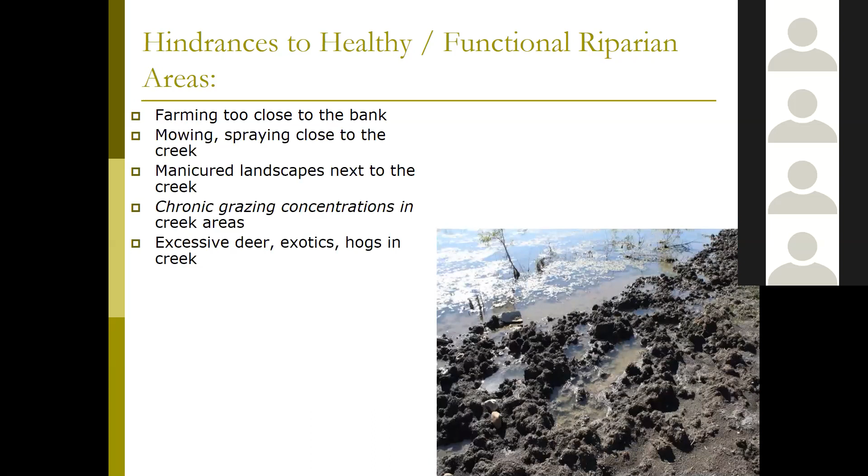Chronic grazing concentrations in creek areas. Excessive deer, exotics, or hogs in your creek area. Burning in the riparian area. I just want to take a second and note this is relating to those wildfires that can be a huge hindrance to the riparian areas, such as the previous wildfires that impacted Bastrop, Texas back in the day. Controlled burning is actually a good benefit to your creek area and your system as a whole to cycle those nutrients and promote new growth. So this is directly relating to those wildfires.

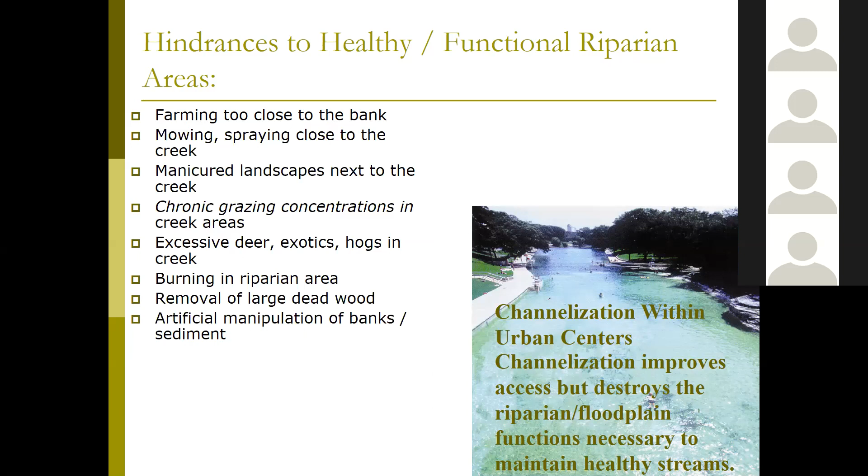Removal of large dead wood can also be another hindrance. Artificial manipulation of banks or sediment. So even though we're improving those access points, we're destroying the riparian floodplain area functions that are necessary to maintain the healthiness of a stream. Excessive vehicle traffic in the creek area. Poorly designed road crossings or bridges.

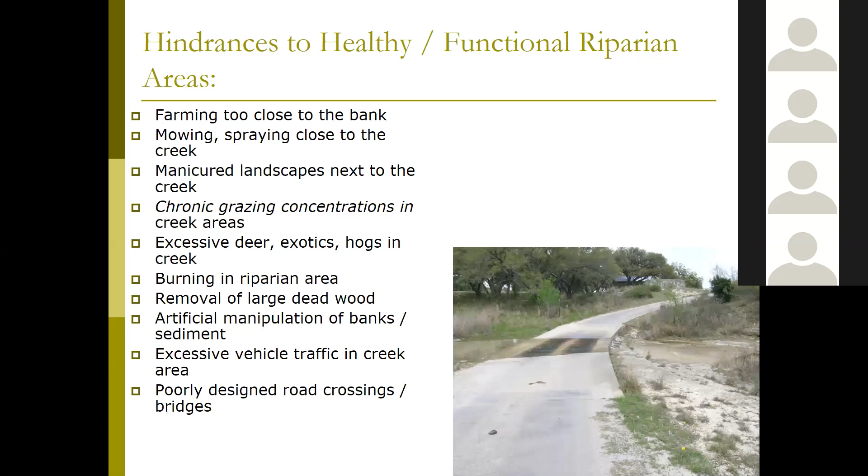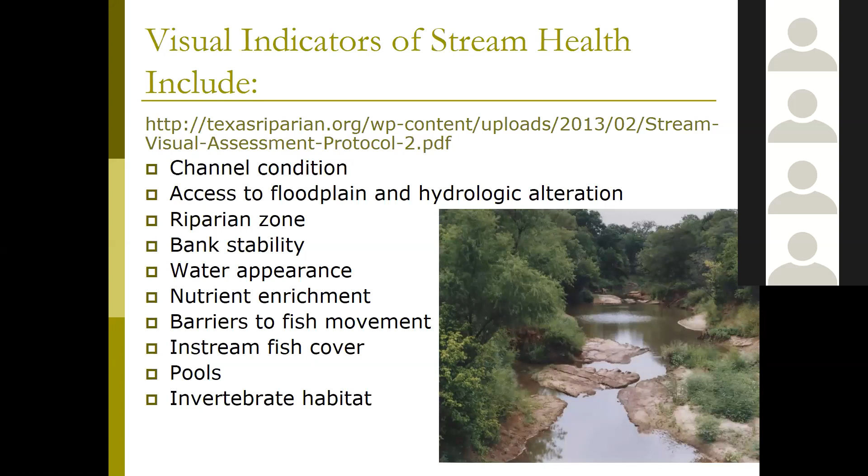Another key one would be nutrient enrichment. So if you see a lot more of a green color, that could be an increase in algal blooms, and that could ultimately lead to an ammonia or rotten egg smell that can indicate that something is going on. Barriers to fish movement. And lastly, in-stream fish covers, pools, and invertebrate habitats in your creek area.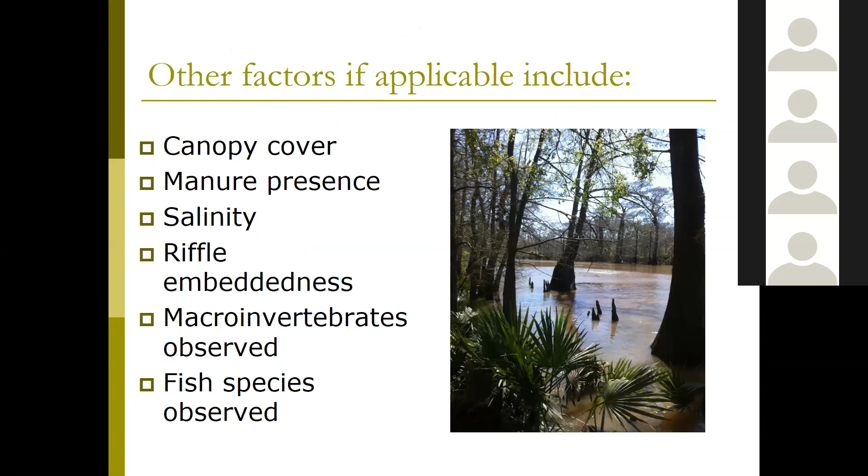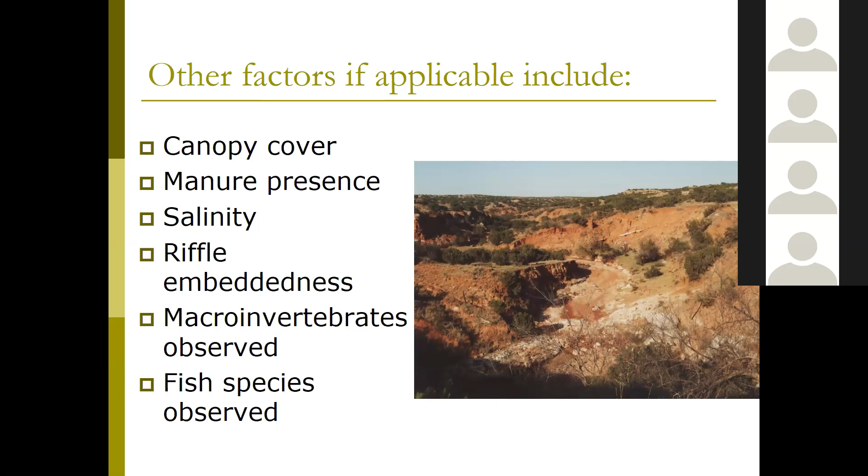So other factors that could be applicable to your stream site for those visual indicators include canopy cover, observing the trees that help regulate the temperature of your stream site by providing the shade that creeks need. Manure present in your creek system can indicate the presence of livestock or excess animals or wildlife closely adjacent to your stream. Salinity, this is not related to natural weathering events. This is more in regards to animal manure or excess irrigation from nearby land. High salinity can lead to bleaching, wilting, or even leaf burn of vegetation, and can ultimately disrupt the water infiltration rate in your system.

Riffle embeddedness is defined as the observed amount of silt and sand sediment overlying and surrounding the larger gravel and cobble-sized particles found in your stream. Riffle embeddedness is a key aspect that helps promote fish spawning and serves as fish habitat as well.

Lastly, the two other things are macroinvertebrates observed and fish species observed. Macroinvertebrates is a technical name for aquatic insects, which can be a great health indicator of your stream based on what species are found. And you can easily make this observation by kicking around the rocks in your stream area and looking to see if there are any macroinvertebrates in your area.

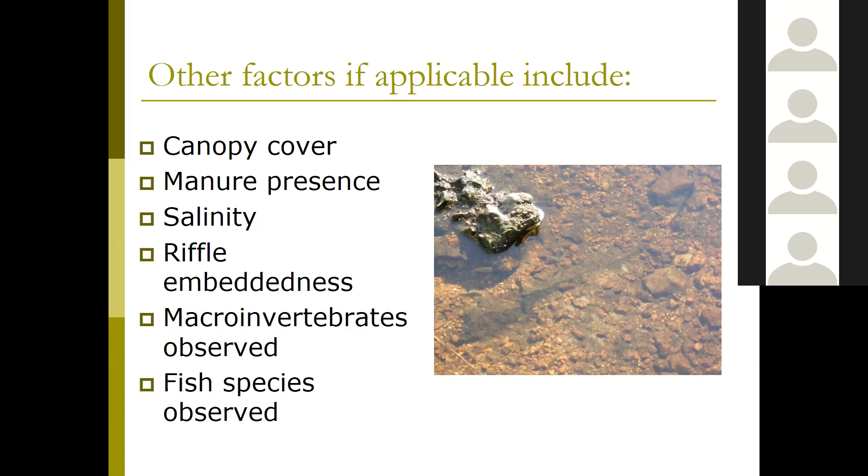So let's talk about different management practices and strategies that you can use. So in general, we are called to be land and water stewards. When we're looking at assessing our system as a whole, the impacts of stream flow and water quality are cumulative as the water moves down the system. This means that any sort of management strategy that you choose to implement in your creek area can lead to positive or negative impacts downstream.

What I like to do is not really look at the symptoms of your creek area. You really want to look at what exactly is the cause of all the issues that are occurring in your system, if any. So as you're assessing your system as a whole, you really want to emphasize what exactly is hindering it. Has something caused a change in the color? Why has there been increased sediment in the area? Or what if I'm missing some vegetation? What could be done to really fix that cause and not just treat the symptoms?

So whatever you decide, whatever management activity you choose, should do one of two things. It should either protect the health of an already healthy existing riparian area, or two, if you have a degraded system, whatever strategy you choose to implement should be able to give that degraded system the opportunity to be a healthy functional area.

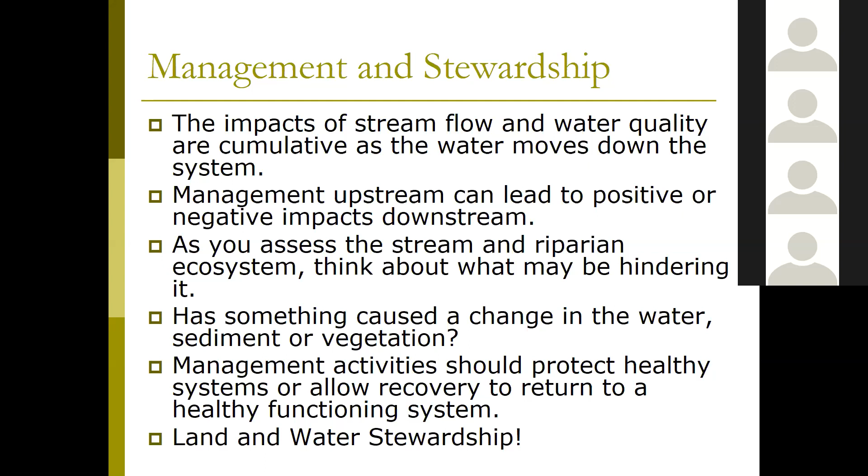Lastly, another key management strategy you want to look at is the access to your streams. This should be a primary goal along your whole system, because this will in turn help eliminate most of the bank erosion caused by human traffic or wildlife interaction with your creek area. This can be done by developing some sort of access ramps or trails with a hardened surface such as coarse gravel or geotextile. This will in turn help reduce the amount of vehicle, boat, and foot traffic along the banks by providing one main access point for recreators.

Now on the flip side, you also want to locate the shade, salt, winter feeding sites, and any sort of manure presence in your creek system, if any, and locate the livestock you have on your property away from your system to help reduce the time they actually interact with your area.

Another key practice you really want to look into is your management of invasive species. These noxious invasive species include any sort of species that has a serious potential to cause economic or ecological harm to agriculture, native plants, the ecology, and your waterways in your local area. These invasives can ultimately affect the aquatic, riparian, and upland areas throughout your system and even in the state of Texas. The Texas Department of Agriculture currently has a list of about 30 noxious weeds very prominent in the state.

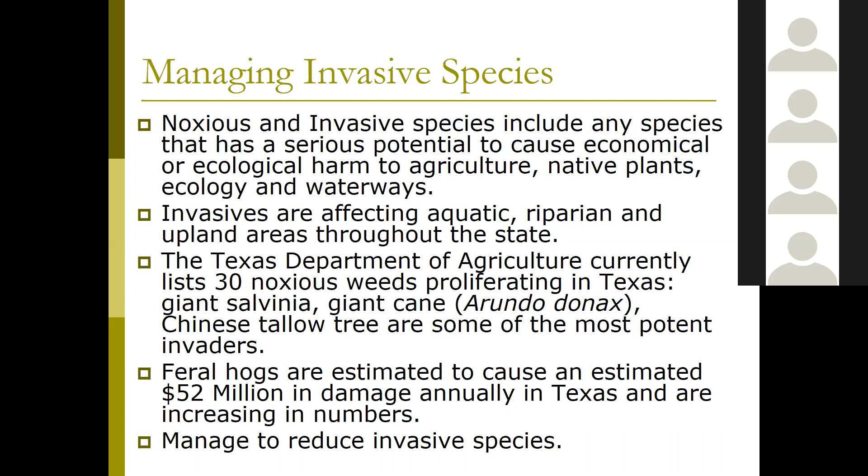There we go. So let's talk about more of an example about a best management practice for a degraded creek area. So the city of Austin has this Austin Grow Zone idea, established to manage for healthy creek systems. And this is more of an example of a passive restoration approach. So the idea of the Grow Zone was taking a degraded system and locating a 25-foot buffer on both sides of the bank to allow for this passive natural plant growth for the entire 25-foot buffer area.

They would monitor for changes over time and apply adaptive management approaches when necessary. And so these adaptive management approaches included things such as coordinating periodic trash removals, weed or invasive vegetation management, and native seeding and planting when necessary. The city put a lot of effort into the education and working with the local community on why this is so important to the citizens, and if there's any cause for concern, just please let the city know.

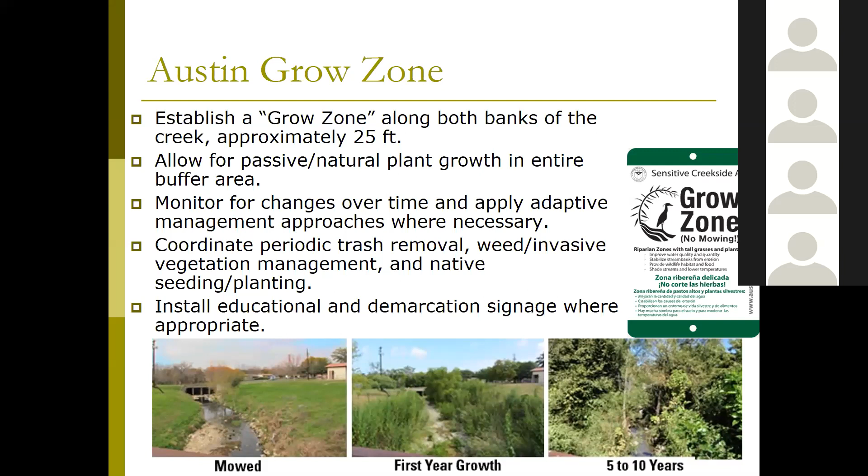So let's talk about photo monitoring now. The idea of photo monitoring is taking repeated photographs at a set location that will allow you to better assess not only the current conditions of your system, but the changes over time. What's also crucial about photo monitoring is the location selection. You want to make sure you're selecting critical sites along the stream where the force of moving water has potential for detrimental impacts. So this can be done at almost 2 different locations per se, a tributary or high runoff location, or where the stream changes course at a point bar or bend.

Whatever site you do choose in terms of your location, you want to make sure you can easily access it over and over again and it is representative of the system as a whole. We're going to touch on photo monitoring more in detail later, but I want to cover 2 different photo monitoring examples from our project partners and even one photo monitoring project that TWDB did. So this is a series of photos that I'm just going to quickly flip through before I start talking again.

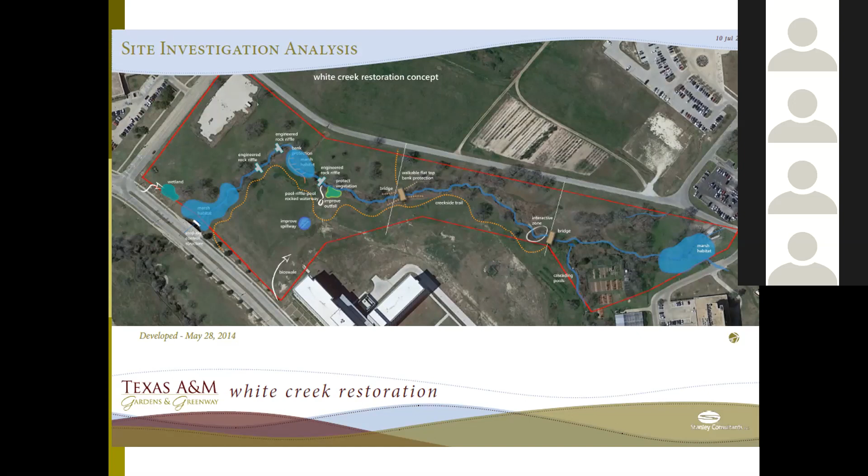So a lot of riparian vegetation was established into this creek area, into this tributary, to not only help serve as a buffer, but also help further stabilize those banks to help reduce the impacts of erosion and sediment loading into the creek area. And that's just more of a detailed photo of this project. So let's look into the actual photo monitoring approach of this project.

So we began this effort in February 2015, and by the end of the project, November 15th, the project was basically completed. A lot of construction occurs on A&M's campus, but we like to say it gets done very quickly. So this first photograph is the site looking just south of that 90-degree bend I was talking about, but looking north towards it. So as you can see, it was lifted and stabilized, vegetation was planted to give it this fighting chance to be this healthy, functional riparian area that we want for our systems.

And if we look at the bottom right photo from December 13th, 2017, we still see this once degraded tributary being this healthy, functional riparian area that we want, and the overall benefit it will bring to the water quality and the wildlife and vegetation that call it home.

And this other example is just another example looking from the 90-degree point bend I've been talking about, looking east from it. So just to give you a different approach of what exactly was done at that 90-degree point bend turn to help really stabilize it with the vegetation, and just to really emphasize that particular point of the stream, because it was very prone to a lot more erosion than other parts of the stream itself.

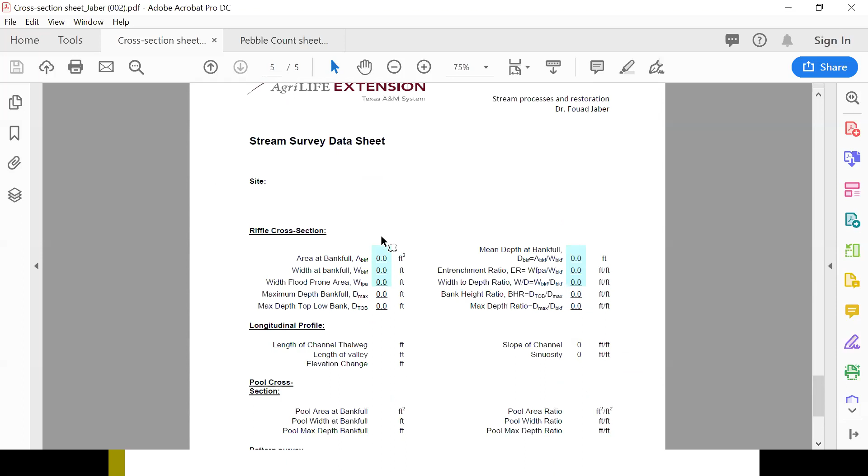This is the sheet that we use, and at the bottom you can see all the different terms that you can calculate using the cross section or others. The ones in blue here are the ones that are calculated directly from that Excel sheet. Other things need to be measured in the field, but that sheet right here shows you a lot of the different parameters that we like to measure in a stream that we'll use later in our restoration, the pool to pool, all these details. Let's go now to the next, the pebble count.

So again, as we said, the cross section allows you to get all the information you need for the letter part of the classification. The number part of the classification is the substrate, which is the type of channel material. And for classification, we usually do several cross sections that are representative of the number of pools and riffles in our reach. So let's say we have a reach that is around a meander that has 3 riffles and 2 pools.

And so we want 100 samples from that section. So we would take 20 samples from each. So that would be 60 from the riffles and 40 from the pools. And so that's representative of the number of pools to a riffle ratio, and it gives us a good number that we would use for the classification.

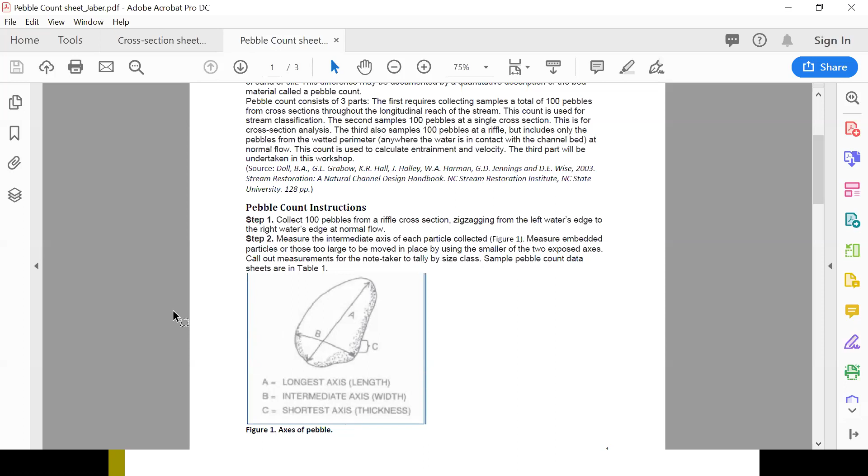We walk into the stream, and we look away and go down and grab the first thing that our finger touches. That usually eliminates bias. If you're looking in the water, your hand will go to the bigger piece, while if you're looking away, it will touch whatever it first touches. You take it and you measure the intermediate axis on it. You see that graph in the handout. And so we measure the intermediate axis and we record it on the sheet. And so we would have 20 samples.

So gravel is usually, I think 5. So this would be, is it? No, it's a 4. So it would be a 4 in this case. And that's basically it. Any questions?